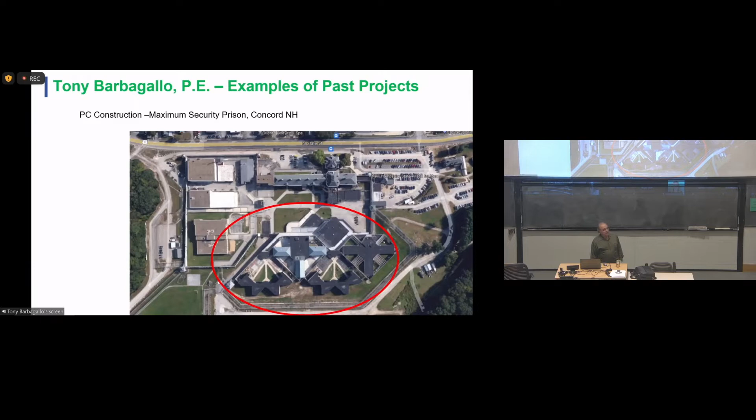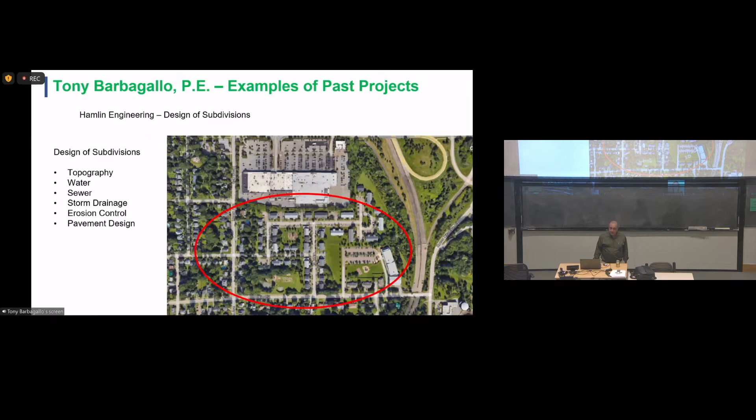You can see it's kind of a more progressive design than your typical prisons. Moving on from there, I moved into consulting engineering and was designing subdivisions for a bit. And while with Hamlin Engineering, I started working on landfills. I was the young engineer in the office, and nobody else there wanted to work on landfills. It was too dirty for them, essentially, so it became my job, and I would be out sampling groundwater at landfills. Back in the day, these were unlined landfills, so there was no plastic liner beneath them. Any precipitation that wet the trash eventually made its way to groundwater.

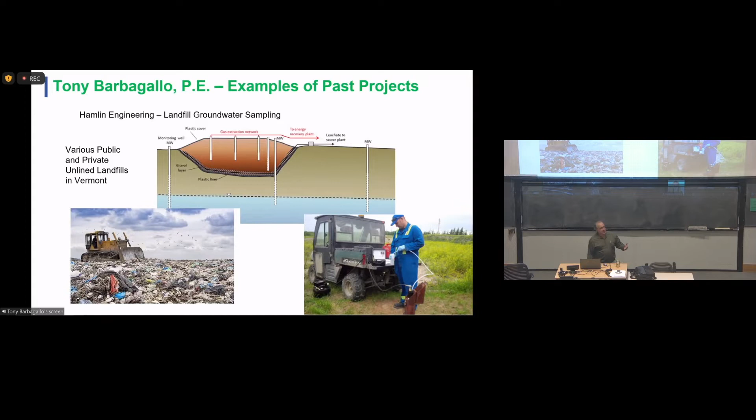And from sampling these groundwater wells surrounding landfills is when I had my environmental gestalt and decided that I wanted to dedicate my career towards helping the environment instead of building subdivisions, essentially. I went on to work for Chittenden Solid Waste District for 20 years. I was facilities manager there, planned, designed, and built a lot of different solid waste facilities. This one here, shown in the red circle, is a materials recovery facility.

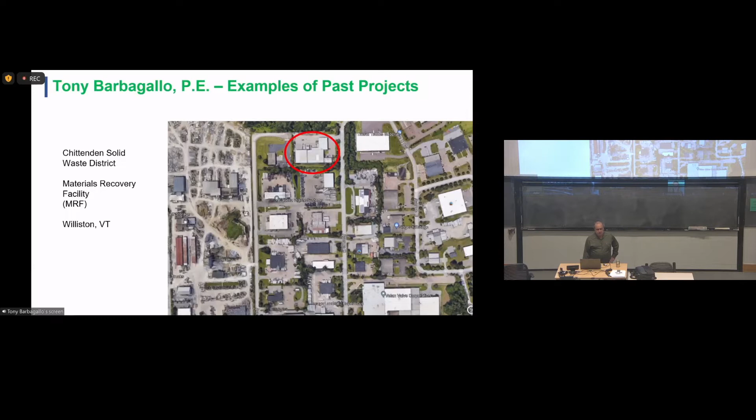It's where most of the recycling in Vermont goes to be processed. I gave you this overview to show you can put a solid waste facility in a relatively developed urban area if you have the proper controls. This facility is a success. It's been operating for close to 30 years now through different iterations and generations successfully.

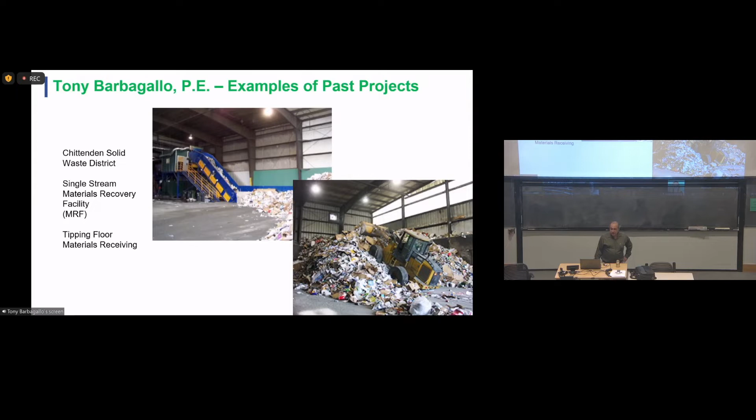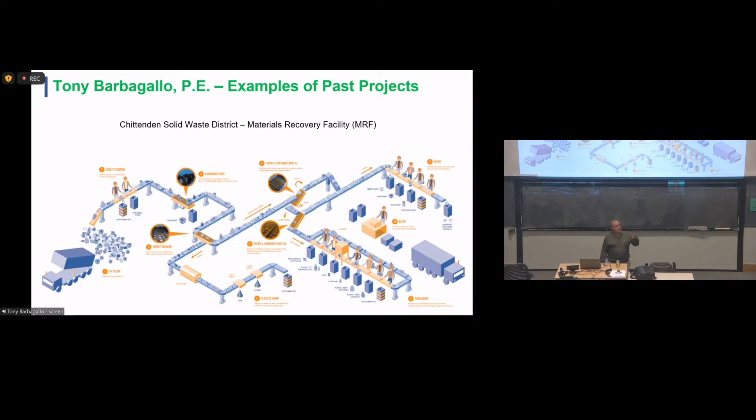It's now a single stream facility, and material all comes in and gets dumped on a tipping floor, then gets pushed up a conveyor. From there it goes through a long process that's too complicated to get into right now. That mixed recycling goes in, and what comes out are bales of material separated by commodity type, then sold on the open market. You can see different bales of cardboard, paper, plastics, and tin there.

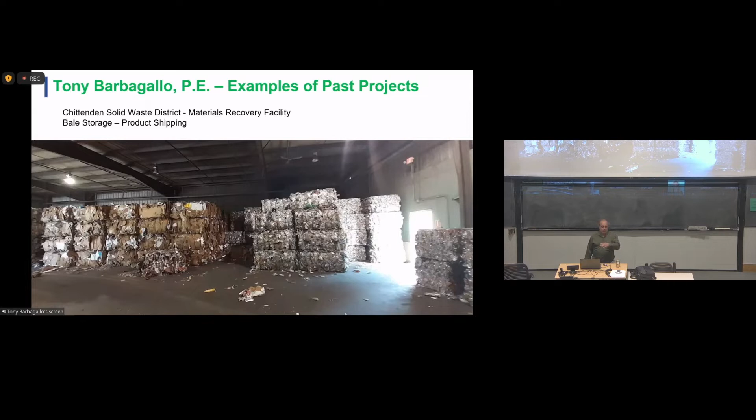Moving on, at Chittenden Solid Waste District, I was also responsible for the Intervale Compost Project, which was the largest composting operation in Vermont at the time. It subsequently morphed into Green Mountain Compost, still the largest compost operation in Vermont, still owned by Chittenden Solid Waste District.

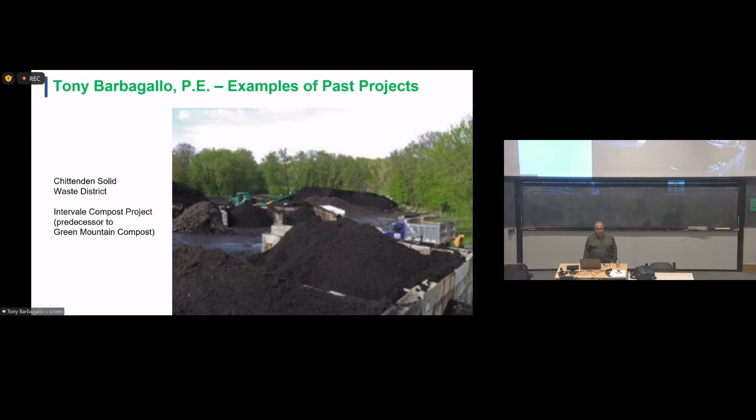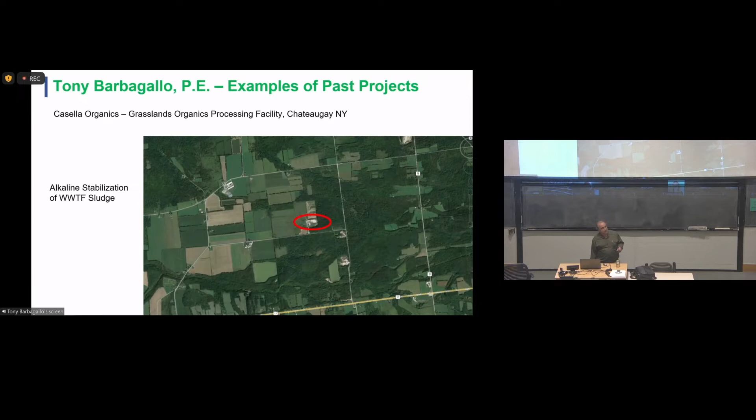Moving on from Chittenden Solid Waste, I was also the Director of Business Development for Casella Organics, and while there I built an alkaline stabilization facility for wastewater treatment sludge. This is sludge from a wastewater plant that gets human waste. The sewer system empties there. A byproduct of a wastewater plant is sludge, which is a problematic material to deal with. This facility took that dewatered sludge and made it into a fertilizer product.

It's in Chateaugay, New York, right next to Canada. It was built in the middle of winter. I threw a slide up to show that sometimes you've got to think about these things. People don't think that if you permit it in summer, you're building it in winter, but that's not realistic. It happens a lot in Vermont or the Northeast because permitting generally takes longer than you anticipate, and that drops your project into winter construction and all the ordeals that entail.

The center photo here is actually the reaction vessel in that alkaline stabilization facility. We would take wastewater sludge, mix it with lime kiln dust, and put it into this reactor vessel where it would sit for several hours, and the pH and temperature would drive it up, so it was a pasteurization process. What came out the other end was a dried product that could then be land applied, and that bottom photo shows a manure spreader slinging the Fertilimer, which is the product brand.

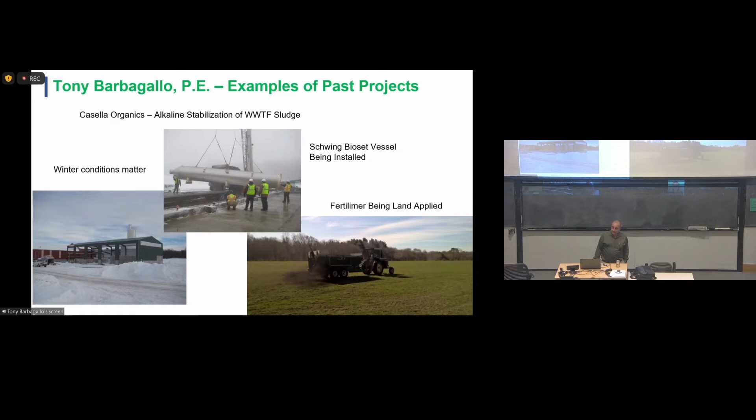That's what we called the product that was made. This is being applied to farmland up in the Chateaugay area of New York right now. That's a quick overview of the arc of my career in a nutshell, if you will. Now I'm ready to move on to the anaerobic digestion project that you guys asked me to come speak about today.

So I work for Vanguard Renewables. Vanguard has numerous digesters across the country now. It's a Massachusetts company with 6 digesters that are on-farm and take cow manure and food waste and co-digest them both. It also has a number of other manure-only digesters located in the west and south, under construction. But I'm here today to focus on Salisbury, since I was involved in the construction of that for the past 3 years.

A little bit of an overview about Vanguard's farm-powered system first: the inputs and outputs. There's essentially 2 inputs to the project. It takes the cow manure produced on the farm we're co-located with, and it brings in food waste from off-site. It combines both of those in a co-digestion system. What comes out the back end is renewable natural gas and an excess of heat, some of which is made available to the farm for use in heating their buildings.

We also come out with a digestate that's used as a low-carbon fertilizer. And there's a lot of greenhouse gas reductions because we're taking these input materials that otherwise generally would have emitted methane into the atmosphere as they were naturally decomposing.

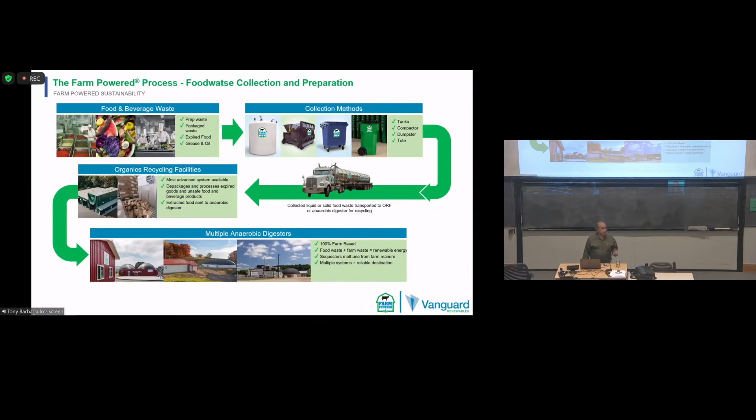So things that are packaged can't go right to a digester. A digester can only accept liquid or semi-solid materials free from contaminants. So they go through this organics recycling facility, or a depack facility as the industry calls it, first, and that removes the packaging material so it prepares it for acceptance at a digester.

A little bit more on the depack facility. This is Vanguard's new facility in Agawam, Massachusetts. You can see it takes packaged material on the lower right, shreds those packages up, separates the organics from the packaging, and the packaging is either discarded or recycled if it can be, while the organics get pumped via tanker truck to the anaerobic digester.

In the center photo there, you can see a bunch of kegs, beer kegs. Expired beer or off-product beer is one of our major feedstocks. It's very high energy, but you've got to get it out of the keg. So this is a contraption we call an octopus that can empty a bunch of kegs at once.

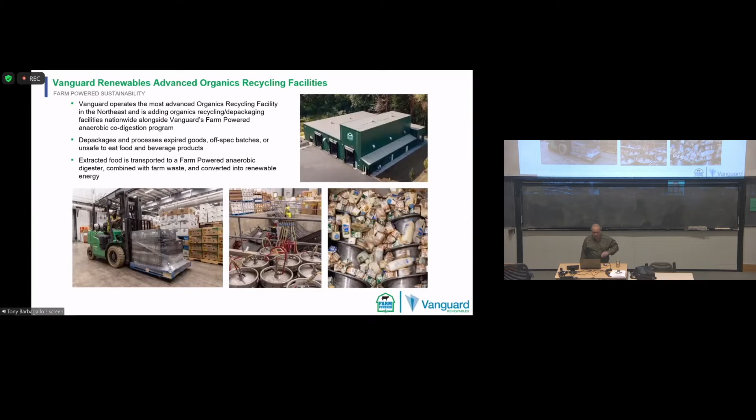So, benefits. Why do people participate in this program? It is a partnership, so we're co-located on a farm, and the farm needs certain benefits to get them to participate. We have a lot of feedstock suppliers, and we have to have a rationale for why they want to participate. A lot of that is driven by environmental benefits and community benefits that aren't necessarily germane just to on-site at the farm or to that feedstock partner, but provide them with community incentives, goodwill, and good PR in some cases.

But a farm can drastically improve their environmental footprint, and we'll get into that further on in the slides. As far as feedstock partners go, generally people participate in order to put that farm-powered logo on their press releases and such. We have a lot of national manufacturers participating right now, and as time goes on you're going to start seeing that farm-powered logo on actual beverage cans and such. So that's kind of our branding, if you will.

For the Salisbury, Vermont project, the partnership included not just Vanguard and the Goodrich Farm, which it's located on, but it's the first project where Vanguard is producing renewable gas. All our other projects were producing renewable electricity or power. For this project, we're upgrading the gas and going to a pipeline, so Vermont Gas Systems is one of our partners on the project. Also, Middlebury College has signed up to purchase the renewable gas we generate, not all of it, but a significant share—a small majority, I believe.

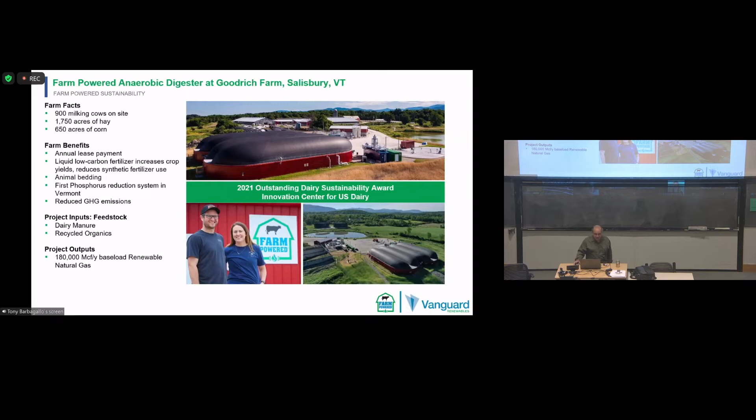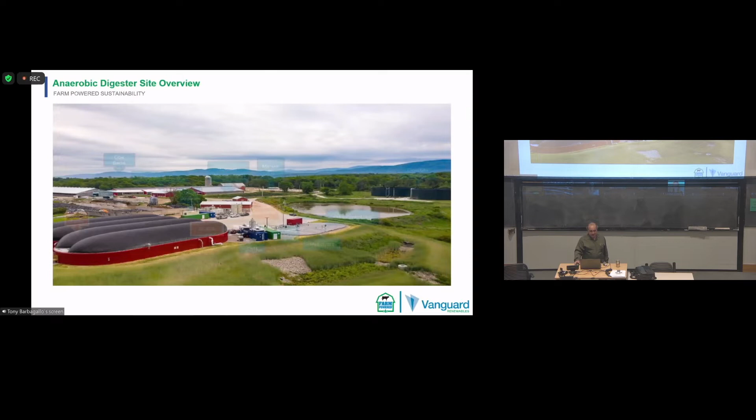And meanwhile, we're generating 180,000 MCF, or thousand cubic feet, of baseload renewable gas per year, putting it into a pipeline. A little bit about the site overview: this is a photo of the completed site, and here are some of its various components. I'll walk you through it quickly here.

The farm cow barns are all in the background of this photo. All the manure flows in a liquid manner through slots in the barns, through trenches underground, all to one centralized pit where we have a grinder pump, and that's where we pick up the system. So the farm is responsible for delivering all the manure to a central point. Then it becomes our responsibility to manage.

We pump it from the manure pit into the separator building where we dewater the manure, and the dewatered product is used for animal bedding. So the farmer gets all the dewatered manure and uses it to rest his cows on. This is very common in the dairy industry, not that innovative for us, but we added this component to it. We're responsible for separating the manure and providing the farmer with an animal bedding that's satisfactory to him.

The liquid out of this separator building is pumped right to the digester tanks, which are right here. Meanwhile, food waste comes onto the site and goes to the hydrolyzer, which is over here. There's a tipping area right here, you'll see later a photo of it. The material is tipped, goes into the hydrolyzer where it stays for a few days, then is pumped into the digester. So that's where the co-digestion comes from — we're digesting manure and food waste together.

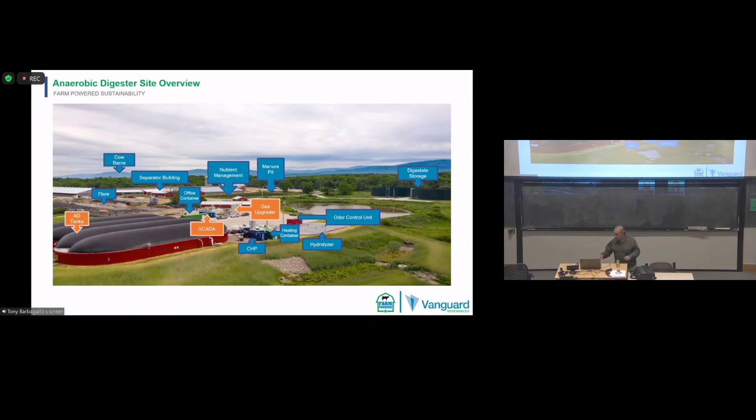Moving on, a little bit of detail on pieces of equipment. The first thing that happens is we separate the liquid manure from the solid manure, and that's what this equipment right here is — these are screw presses, essentially a cylinder with fine slots in it and a progressive screw in the middle. Manure is put in at one end, and as that screw spins, it squeezes it and squeezes the liquid out, and eventually what comes out the end is a dewatered animal bedding product that the farm uses.

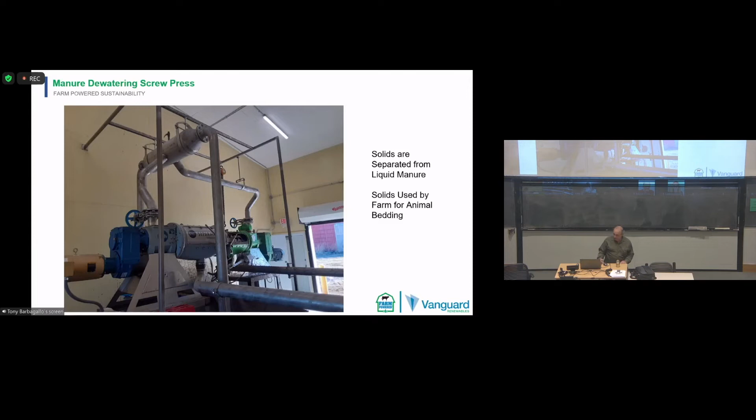And this is what that looks like. So manure comes in at 7% solids into these screw presses. This animal bedding here is about 47% solids, so we're squeezing a lot of the water out. It still has moisture in it too, but 47% is actually a very high solids content for a mechanical dewatering process to achieve.

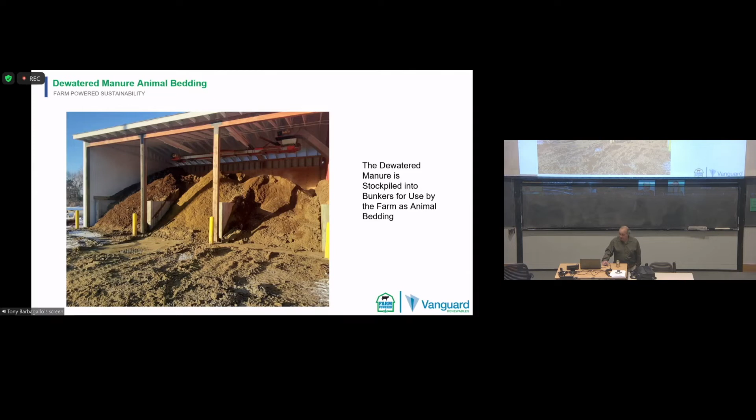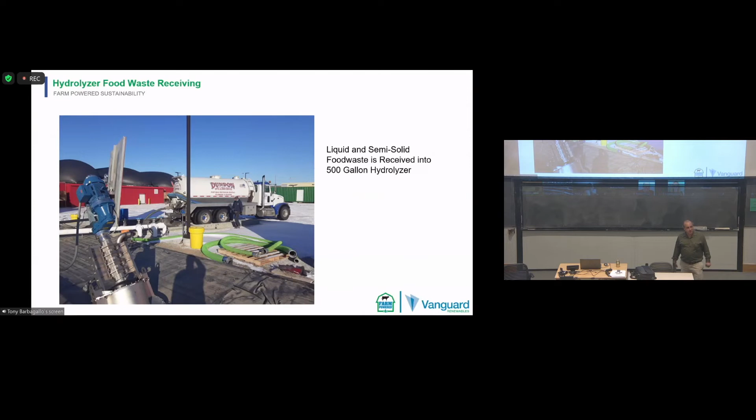This right here is a shaft propeller mixer — there are 2 of them on the hydrolyzer. The hydrolyzer is a 500,000 gallon underground tank. It's oval, with a center wall in the center, so it's a raceway, and the material goes around and around that center wall. This mixer has a propeller on the end, and that's what pushes the material around and helps chop it up a little as it's going around too.

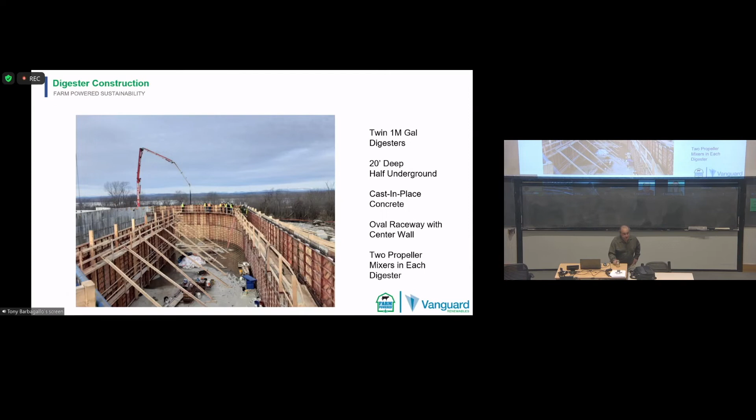Here's a shot of the digester under construction. There are 2 one-million gallon digesters on site, cast in place concrete, 20 feet tall — half of it is buried, half is above ground. Similar to the hydrolyzer, they're oval with a center wall, and you can kind of see the ovals going around here, and then this is the center wall. It doesn't connect — there's still an opening at both ends, so you get a racetrack that goes around and around, and the 2 propellers just push that material around. It stays in the digester for about 27 to 30 days. It's a mesophilic digester, so it operates between 100 and 104 degrees Fahrenheit.

On top of those concrete walls, we put a roof, and it starts off by laying timbers across. These timbers will go all the way down. They're just being installed here.

Then on top of those timbers, we put an elastomeric membrane, and that's put over the whole digester. It's sealed around the edge with an airtight ring, essentially, to keep the gas from escaping. And that membrane will blow up and contract as the gas fills and is captured and released from and used.

Also, there's a net that's used. So the elastomeric membrane really doesn't have any structural capacity, so to keep it from overexpanding, we put a polypropylene net on too, and that's really what contains the gas bag from overexpanding.

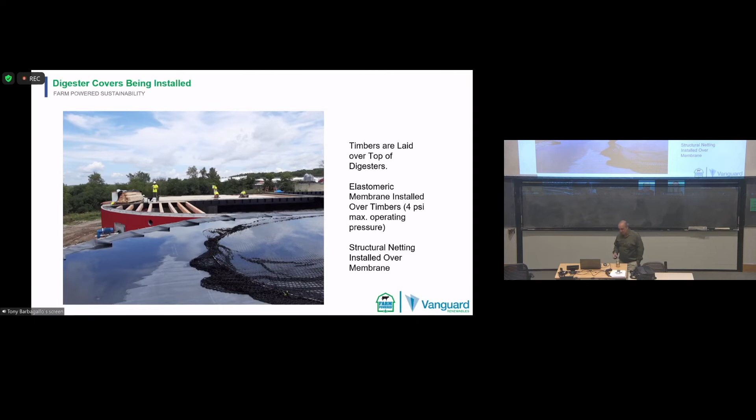This is what it looks like when it's done. You can see that the methane bags are inflated here.

It's a low pressure system, so at maximum, the maximum pressure we'll have in these digesters will be 4 psi. Anything more than that, and there'll be automatic venting that goes in place. And there is a flare, so if we cannot use the biogas to upgrade it, the gas gets flared before it's released.

The digestate out of the digester that is eventually used by the farmer goes through an intermediate process called dissolved air flotation to remove phosphorus.

Vermont has a fairly large phosphorus problem, and a large part of that is being driven from runoff from farms. The state is under a federal directive to remove its phosphorus loading to Lake Champlain. So there's a lot of constraints being put on farmers these days to reduce their phosphorus loads.

What we've done on this system, and this is rather innovative, there's not a whole lot of manure systems in the country that are removing phosphorus like this. But in order to allow the farm to spread more digestate, they needed to remove phosphorus. So in the past, they were producing manure and land applying it. How much they can apply is driven by the nutrient loading, nutrient uptake of the crops they're growing.

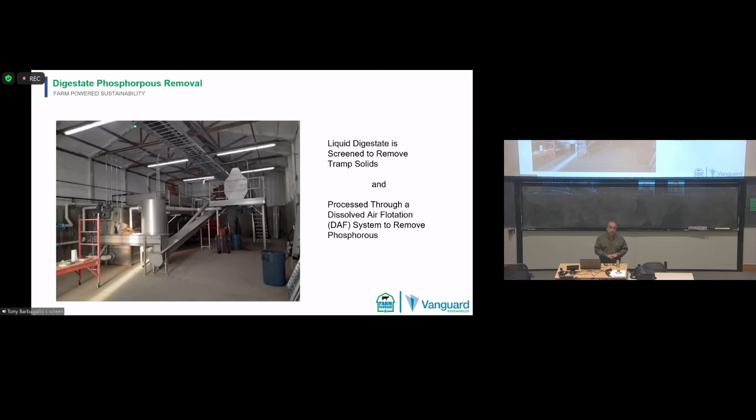The reason we have so much storage is because of the winter conditions. You're only allowed to land apply this digestate during periods when crops are growing, so we have to have enough storage to go the entire winter. Adding a safety factor, that's 6 months. So regulations require 6 months of storage, which is what we built.

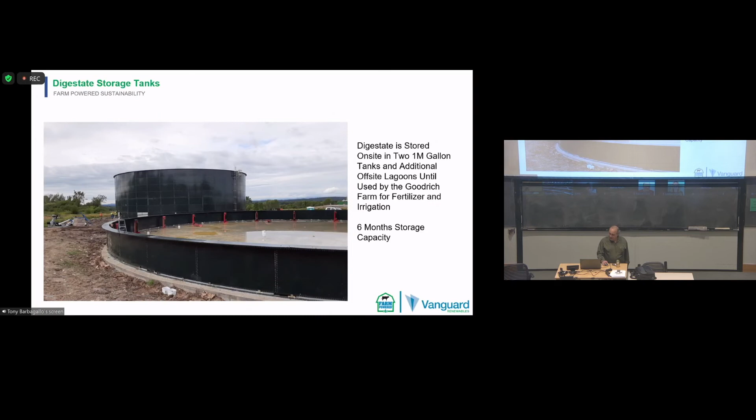As far as the gas stream goes, gas comes out of the anaerobic digesters at 60% methane, CH4. You can't put it into a pipeline like that, though. You could burn it in an internal combustion engine and generate power at that concentration, but natural gas pipelines require about 97% methane. They also have a lot of other parameters that need to be met: moisture content, oxygen content.

There's about 20 different parameters that we have to comply with. So this gas upgrading system takes that raw biogas and upgrades it to a quality that is applicable to put it into the Vermont gas pipeline, and that's what we do.

There's different types of technologies that can do this. This project uses pressure swing adsorption to do that. You could also use a membrane system or an amine system. They all have different advantages and disadvantages, and I don't know that the industry has settled on one of those technologies yet.

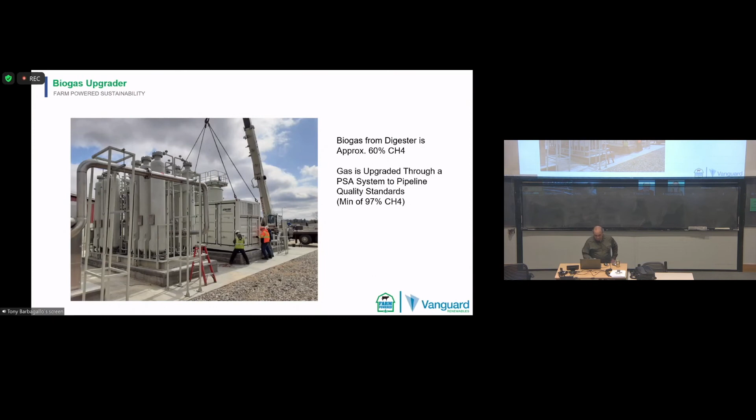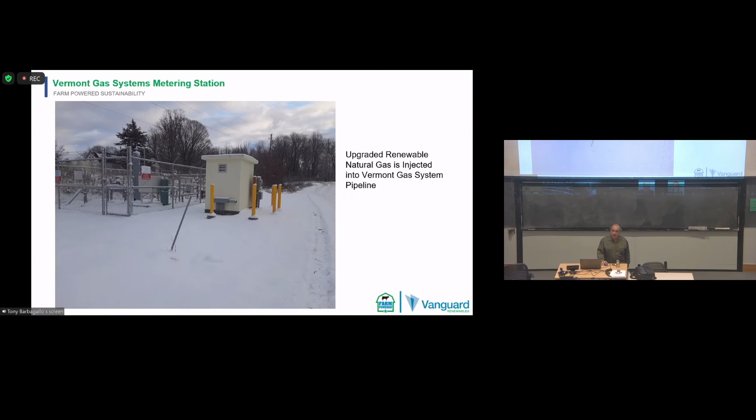Out of this upgrader, which comes out at 97%, we go into the Vermont Gas pipeline. Vermont Gas, as a partner, extended the pipeline 3 miles to get to this project, and they installed a metering station right at the entrance to the project. The pipe comes out of this, goes directly to our upgrader, and we both have controls in place to measure what we're selling and buying so that we can agree. It's been a very favorable relationship. This is Vermont Gas's first renewable gas project, so it's kind of a feather in their cap as well, and a good part of why they wanted to partner with us.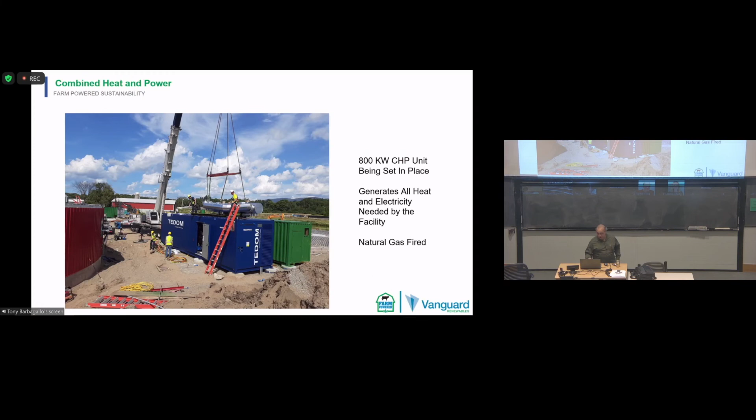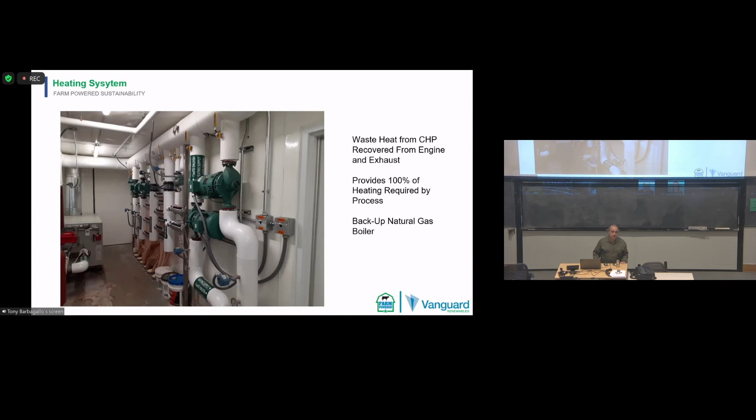I mentioned earlier, in the event that the combined heat and power system is down, we have a backup boiler, which is as small as this unit right here. That's all it takes to heat the digester, the hydrolyzer, and our buildings, and supply some extra to the farm. These are the heating headers here, so you can see we run heating pipes to the hydrolyzer and the digester. When we were building the digesters, we embedded PEX tubing in the concrete, so there's loops of heating lines in the concrete, in the floor and in the walls. We insulate the outside of the tank, heat the concrete walls, and let that heat the digestate. Other technologies put heating elements in the digestate, but there's been problems with blinding and corrosion with those systems. This system buries it in the wall of the concrete instead.

It's fully alarmed and notified, so if any of these pumps go out of set parameters or any liquid levels go out of set parameters, an alarm goes off. The operators get that alarm on their phone, so 24/7 there's emergency response if something goes out of whack. The facility operates 24/7, 365, however it's only staffed during working hours and on call if something goes wrong. Generally it's 5 days a week, 8 hours a day staffing.

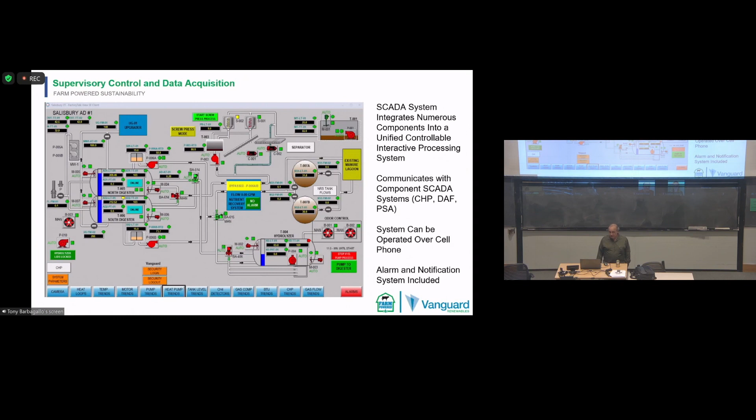There are a bunch of other mini or subsystems in that, and they have their own SCADA system. For instance, the CHP unit has its own SCADA system, the biogas upgrader has its own SCADA system, the DAF unit has its own SCADA system. You've got to get all of these different components to work in harmony and talk to each other. So we take those SCADA systems and integrate them into our overall SCADA system so that everything's talking to each other and knows what everybody's doing. We're also able to track trends to see where we've been, which helps you see where you're going. You can identify your alarm history to find out where all your alarms are, and that helps you focus on where you need to make improvements in the future. SCADA systems are pretty essential these days.

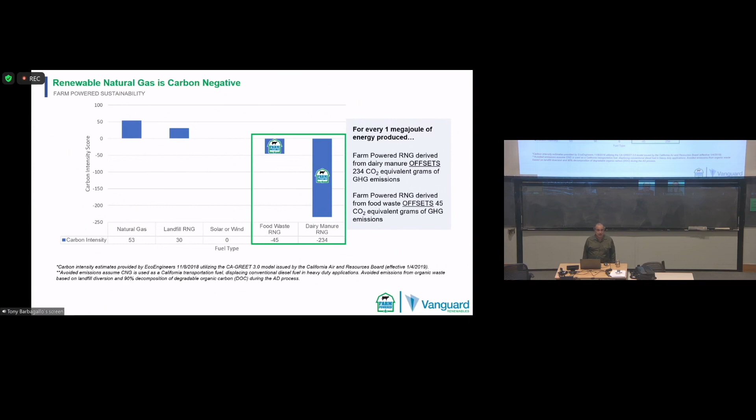This slide shows that renewable energy from food waste and dairy manure has much fewer carbon emissions than conventional natural gas or landfill renewable gas. These numbers come from the California Air Resources Board, probably the leading agency in the country doing this kind of metric. It's a big driver for why we're going in this direction instead of producing electric power. In the past, most digesters produced electricity, but because of changes in the energy field, you're seeing less and less of that these days, and almost everybody is now moving towards upgrading their gas to renewable natural gas, mostly because the economics favor that more than anything else at this point in time. I can go on, too.